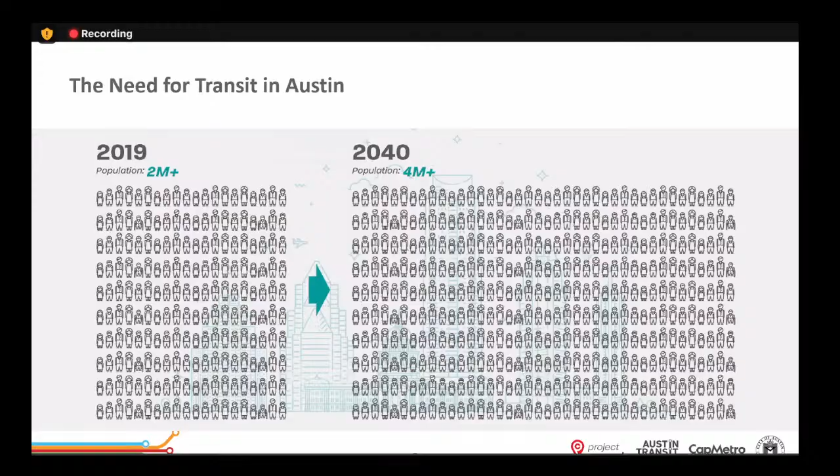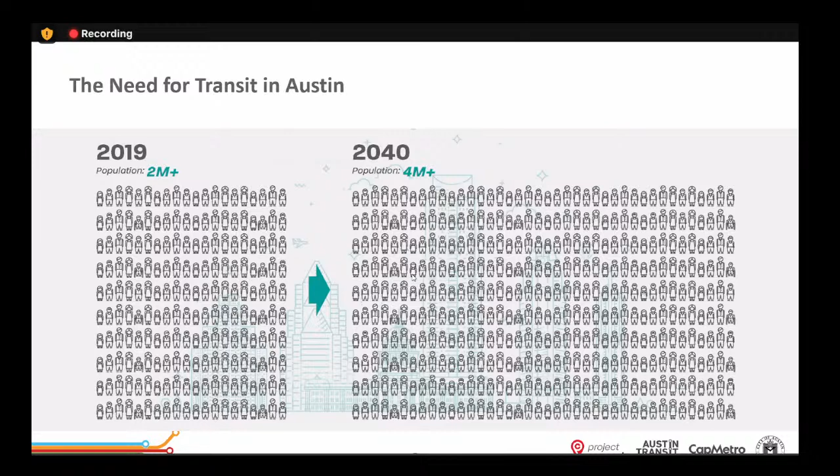So why are we here? What you see here is a projection of the growth in Austin's population. We're seeing a doubling of the population in Austin by 2040. So, where are these people going to travel? How are they going to get to work, to play? So Project Connect helps us to answer that growth in the population of Austin. Next slide, please. Thank you.

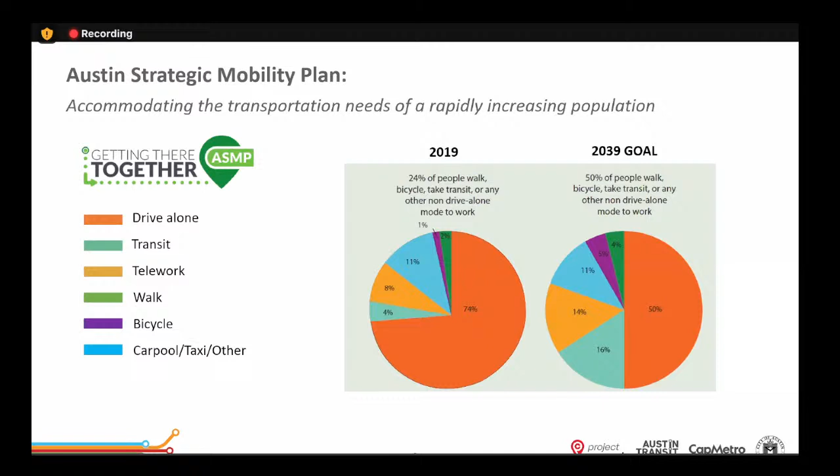So the Austin Strategic Mobility Plan, which was approved by the council in 2019, aims to keep the number of cars constant while growing our population by the additional 2 million people we just saw on the previous slide. You'll see that as we go through the design drawings, this is where policy rubber meets the road, and we are designing to a variety of modes.

Here you can see the Project Connect program components. We have a new light rail system, a transit tunnel under downtown, an expanded bus system with 4 new MetroRapid routes, as well as 9 new park and rides, and a transition to a zero emissions fleet. Next slide, please.

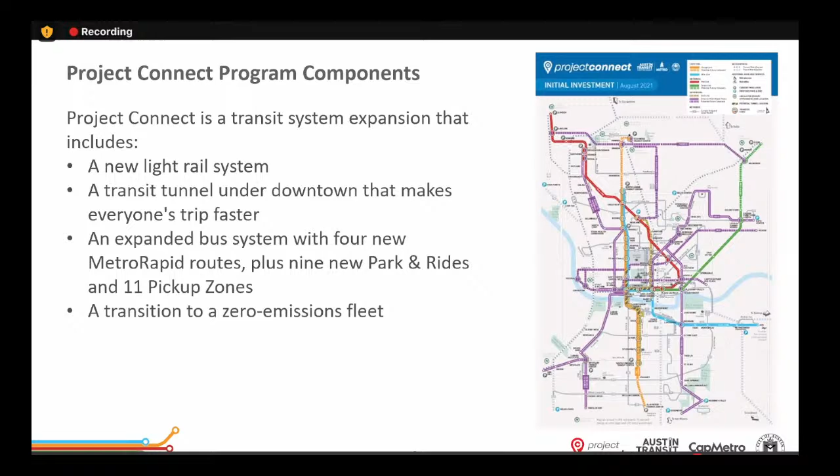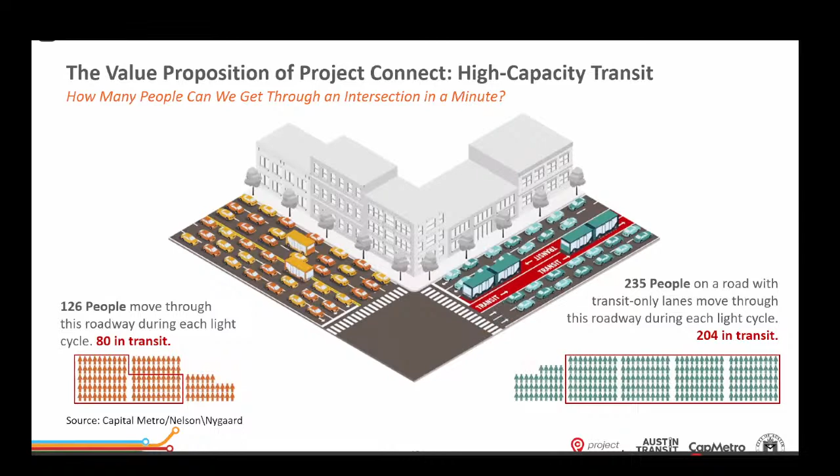The value proposition of Project Connect. So what we're really here to talk to you about and what we're looking to achieve is increasing the throughput of people on the street. You can see here in this illustration that the street on the left will move 126 people, with 80 of those folks in transit, whereas the street on the right will move 235 people, with 204 in transit.

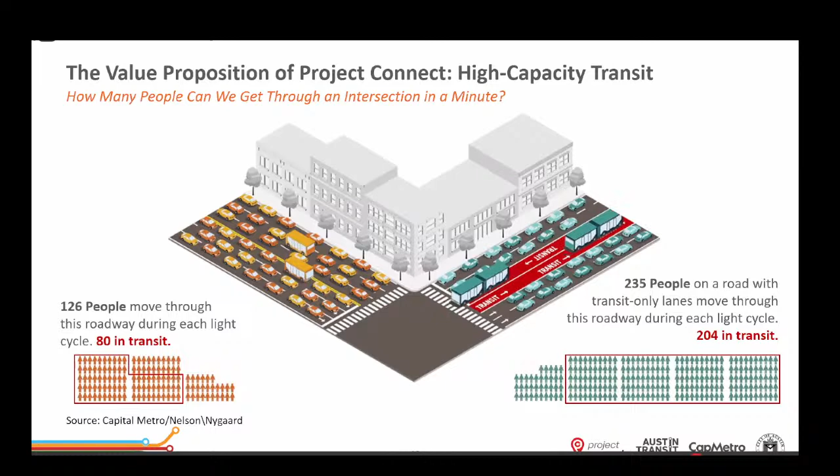Next slide, please. Thank you. So I really want to stress that Project Connect reflects the Austin community values. This project will help create thousands of good local jobs and provide more access to healthcare, education, employment, entertainment, and essential services. It will also create and maintain a more affordable place to live.

There is a shared passion in our community for the environment. That's why we are committed to sustainable practices. They are core to Project Connect, including a zero emissions fleet. And technology and innovation inspire much of who we are as a region. And so Project Connect is embracing that spirit, looking to make transportation smarter, more efficient, enjoyable, and easier to use.

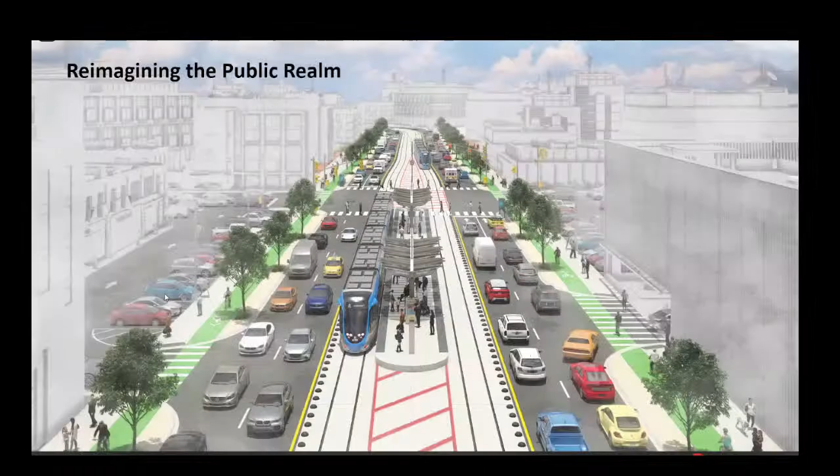Next slide, please. Thank you. So here you see an artist's rendering of what the street could look like. This isn't necessarily one particular area for either the orange or blue line, but it's representative of our program's goals. So just working our way left to right, new sidewalk, new bike lane, trees, roadway for vehicles, the light rail line in the center of the roadway with a station platform, and then a similar treatment in the other direction of new sidewalks, a bike lane, and trees.

So where are we right now in the process? We have completed our 15% design, and that was published in the summer of 2021. And we have entered into FTA, or Federal Transit Administration, project development. We are working on our 30% design, and we are looking to release that in the summer. And this all leads to, in the winter, a final EIS, or environmental impact statement, and an FTA record of decision, or ROD.

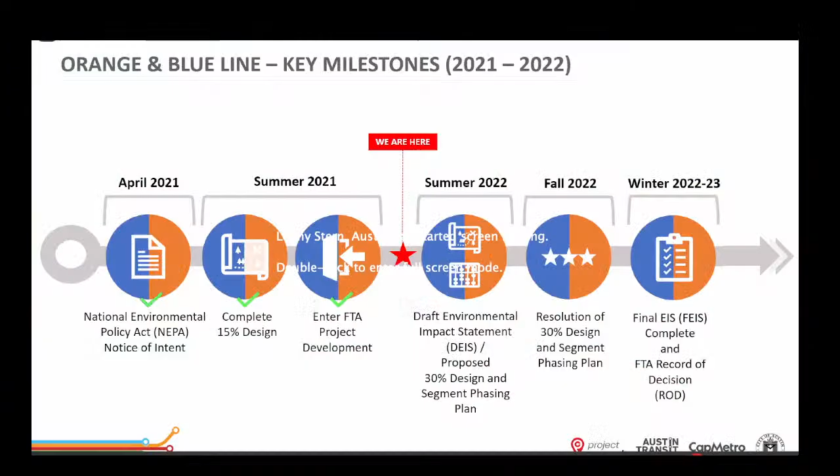So I wanted to remind everybody where we actually started. So back before the, oops, we lost our presentation here. Well, I'll start verbalizing until the picture comes back up. Back before the referendum, we went through a process called the alternatives analysis, which ultimately resulted in what we call a locally preferred alternative. And that's where we started at that time. This was pre 15% design. So we did not have that, right? But after the referendum, as we go through the process of beginning the preliminary engineering effort, you go through all types of discovery, and we lost it again. There we go. Thank you very much, everybody.

So one of the things that we discovered, we always knew that we needed to have a tunnel in the downtown area. That's because the block lengths are too short to be able to accommodate a full length of a train and a train's platform in that particular area, and we need to have at least 300 to 400 feet there for our full length trains. So we always knew that we were going to need to have a tunnel there.

And the intent at that time was, after Republic Square, that we would come up as quickly as we could and cross over Lady Bird Lake on a bridge. And that was, again, before the referendum. But as we went through the design process, we determined that because of that distance and the depth that we needed to be for the Republic Square station, getting back up to grade in such a short distance was going to be not very favorable. It could be done, but it was going to be very challenging for the vehicle to climb more than a 6% grade.

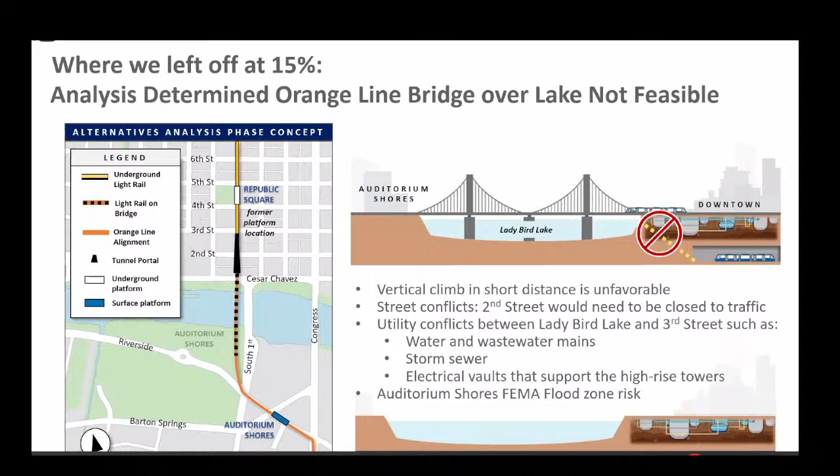So we determined that the best way to go would be to continue under the river. And if you can click there, we basically would stay underground. And you can see that in the illustration there below. So that was determined to be the best approach. And that's where we left off at 15% design. So let's click to the next slide.

So at that point in time, the question became, all right, how do we want to get back up from under the ground? We were looking at 2 options during our 15% design, what we called a short tunnel and a long tunnel. And you can see on the left hand, the short tunnel, that the portal, again, that's the transition point of where you come out from the ground, is around Nellie Academy area. And then the light rail would run at grade the rest of the way south

as it went through the SoCo business district. Now, in that scenario, our South Congress station would have to be fairly far south in that Leland Mary area, because it needs to really be on a flat spot. As we all are aware, the South Congress area, especially the South Congress business district, is quite a steep grade there. And it's just uncomfortable for passengers and trains and people with disabilities to have access to a platform that's on a slope. So we need to go to a flat spot. And that area between Leland and Mary, which is near the elementary school, was the best spot.

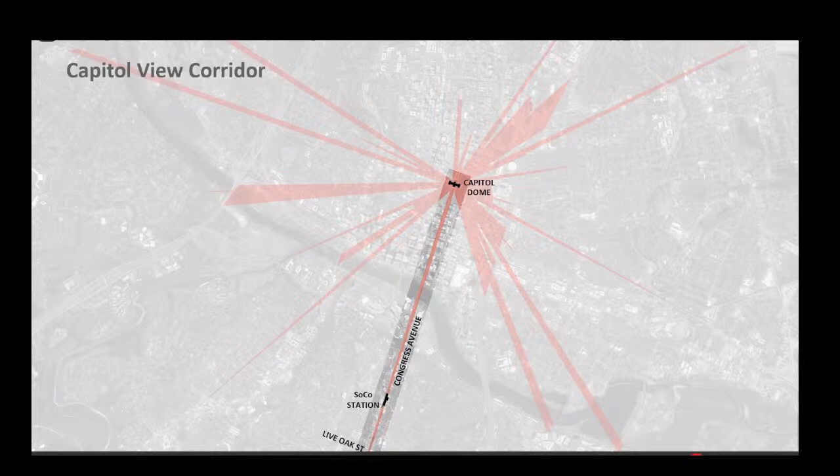The CVC was written to maintain the view of the Capitol Dome from key vantage points throughout the city. Here is a look at the CVC and the South Congress Corridor, where the CVC runs from the Capitol to Live Oak. Here, you can also see the proposed underground station and portal locations that we will talk through later in the presentation. Next slide.

This is how the CVC impacts the project. The two options we had at 15% are in the CVC. Our in-progress design reflects that we know the Capitol View Corridor extends to Live Oak. To comply with state law, the first location the train can surface is south of that viewpoint at Live Oak Street, and the tunnel is extended 900 feet further from the previous long tunnel option. The current extended tunnel option is the only option that is currently permissible given the requirements of the CVC.

Next slide. Here you see all four options we have explored. The first is the option that we showed you earlier that Jerry went through that we found does not work due to technical constraints. And a reminder of what we looked at: 15%, the short tunnel and the long tunnel options. And lastly, the extended tunnel resulting from adapting to the underground components of the CVC.

There are additional costs, which we will discuss on the next slide, but there are also additional benefits, such as it provides increased transit efficiency, has few neighborhood impacts, and provides for a more centralized SoCo station location. Next slide.

Here we see the rough order range of costs. To set the stage for this slide and to put these costs in context, when we look at the pre-15% design, it's from 3rd Street to Live Oak, which is a little further south than what the graphic shows here. That cost was estimated in the range of $300 million to $350 million. And as previously discussed, that option proved infeasible.

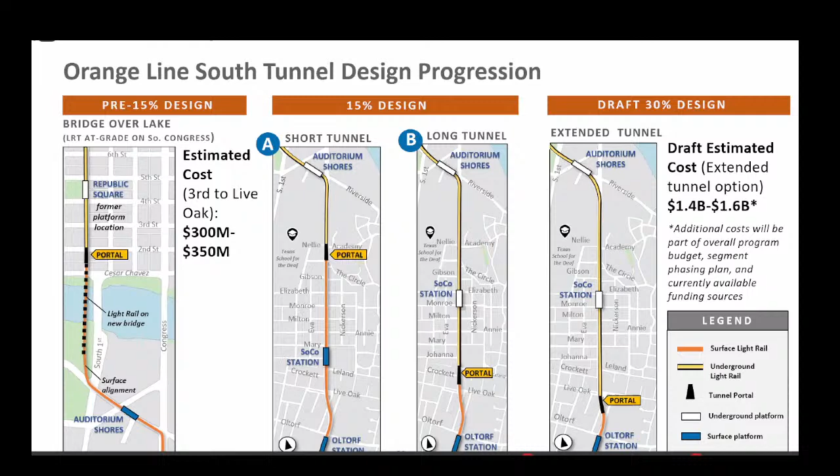Okay, we are now going to transition to walk through a segment between roughly St. Ed's near Havana and go north towards Nellie Academy. We'll cover the segment north of Nellie Academy in another working group meeting planned for June. But before we dive into the design, we want to orient you to what you're about to see in the engineering drawings. Next slide.

North is to the right, south is to the left. The northbound tracks are red, the southbound tracks are blue. The sidewalks are outlined in orange, the bike lanes in purple. Traffic lanes are shown in a light blue teal color. The right-of-way line is shown as a white dash line, and the curb line is a green dash line.

Now, as we go through this, you may note there are property impacts in this segment. At this point, we have notified property owners, but if you are a business owner or know of one who has not had the opportunity to meet with us, we are using this as another touch point to be open and transparent. So please use this as an opportunity to get in touch with us. Andrew and Lonnie will now walk us through the proposed design update, starting with the area just north of St. Ed's.

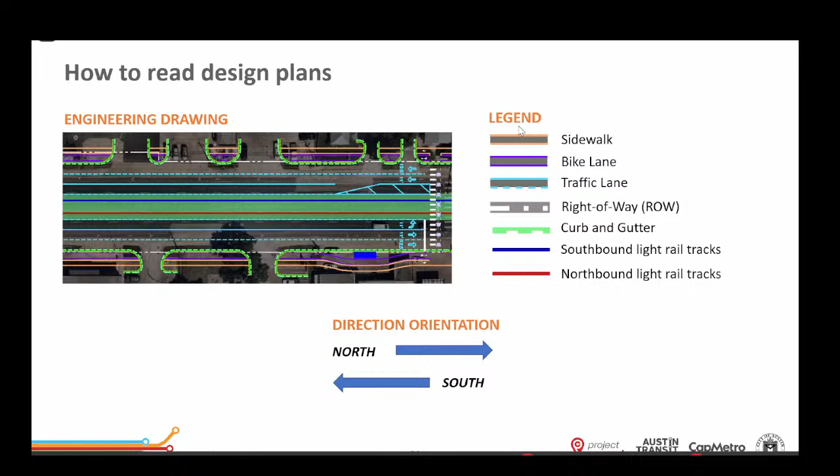But Andrew, it looks like you're on screen now, and this is not what people want to see. They want to see the specific engineering drawings, and I think you're sitting on that. Are you able to share your screen? Yeah, I'm trying to jump in right now. Let me know when you can see it. Okay. All right, very good. So this has been mentioned. I still cannot see it. I see a black screen. There we go. There we go.

All right, so lots of colors, and I have color blindness. So can you orient me a little bit better here? Yeah, so just to reiterate what Sophia was going through, imagine yourself as a bird in the air looking down on the transit system. Right in the middle of the roadway there, in that green highlight, is where the light rail system will go. We're looking at a station platform at St. Ed's, which is represented by that hatch there in the middle.

And then outside of that, in that light blue color, is where the roadway striping would be. So that's where the vehicles will be able to travel outside of the transit system in the middle of the road. And then outside of that, we have that green line. That's where the curb lines would be on the outside of the roadway system, with sidewalks and bicycle facilities outside of that.

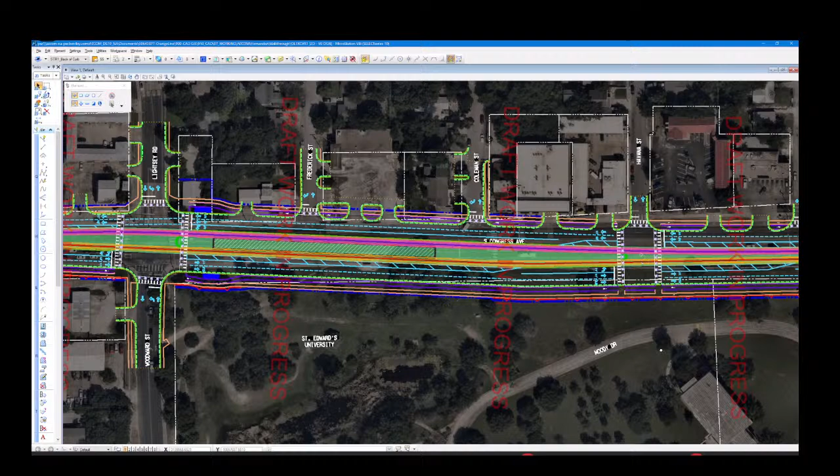Just want to zoom in just a little bit more. Absolutely. How's that? Maybe one more. There you go. There you go. Now I can see.

Great. Okay, very good. So I'll pick it up here at Havana Street, just north of that station platform. I do want to make a general point that, existing case today, cars are able to freely move around these roadways. To put the transit system in place, we really have to control those turning movements and control where people can cross the transit way, for safety and operations reasons.

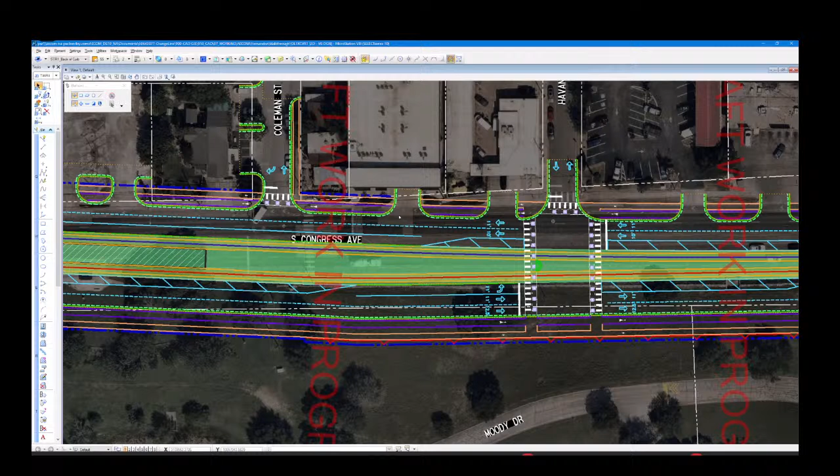So because of that, we will have signalized intersections at key locations, Havana being one of those locations where vehicles are able to make those turning movements and access the existing businesses on either side of the corridor. So Havana is a good example of where one of those signalized intersections would go. I'll keep moving north a little bit here, and bear with me on my bandwidth. I hope it's not too choppy for y'all.

I'm glad you brought up Havana, because I know that the Metro Rapid station isn't really centered around Havana, and neither is the hybrid beacon, but Havana is a central street for that neighborhood over there. So new access for that part of town. All right, so we're heading north, it looks like. Yeah, that heading there's north. 2 lanes heading north and a left-hand turn lane there by University.

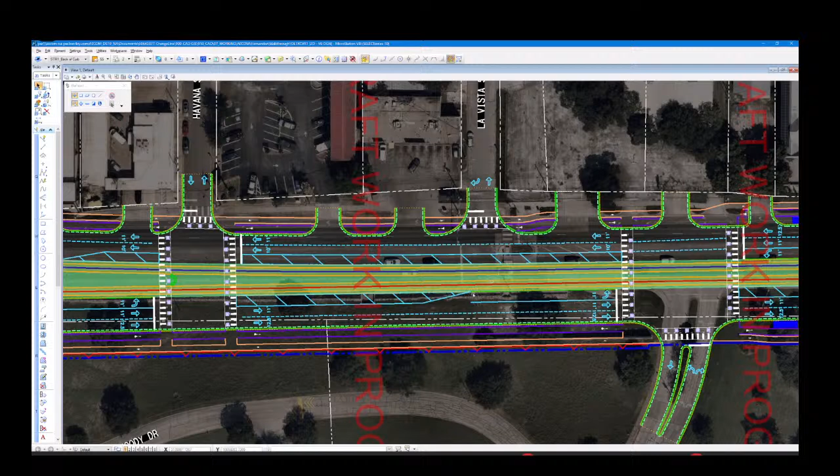Yep. So we get to La Vista and there's no longer the ability to cross the guideway or cross the street here. So vehicles would have to go to either University Circle here or Havana to make a U-turn and access either side of the street. So just wanted to point that out as an example for what the new access plan would be with the light rail in the middle of the street.

You'll notice these driveway tie-ins. This green shape is where we tie back into the existing pavement. We are going to maintain all driveway access along the corridor. So you'll notice these areas that cut into the sidewalk and bike ped. Those are where those driveways would go to the existing businesses along the corridor.

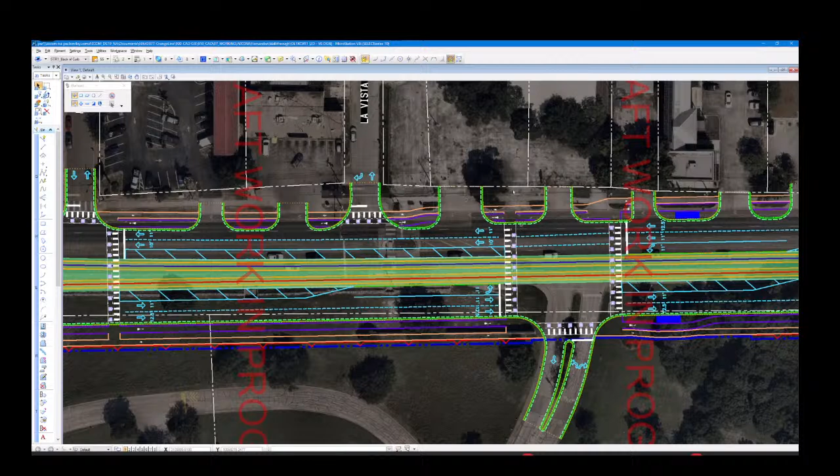I'll keep moving north. You'll notice these blue boxes. These will be local bus stops in the final configuration. So, key connection points with the light rail system. We're going to have to connect with the local transit systems as well, make those key connection points along the way. So our design definitely includes bus stops along the way, as well as our new light rail platforms in the middle of the road.

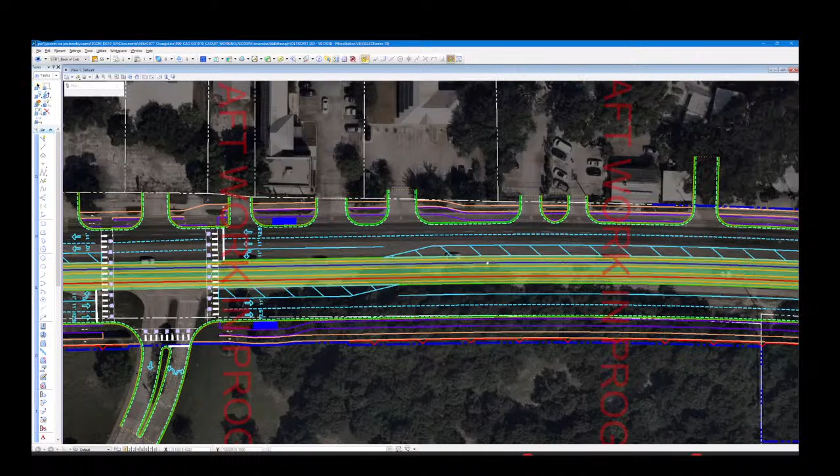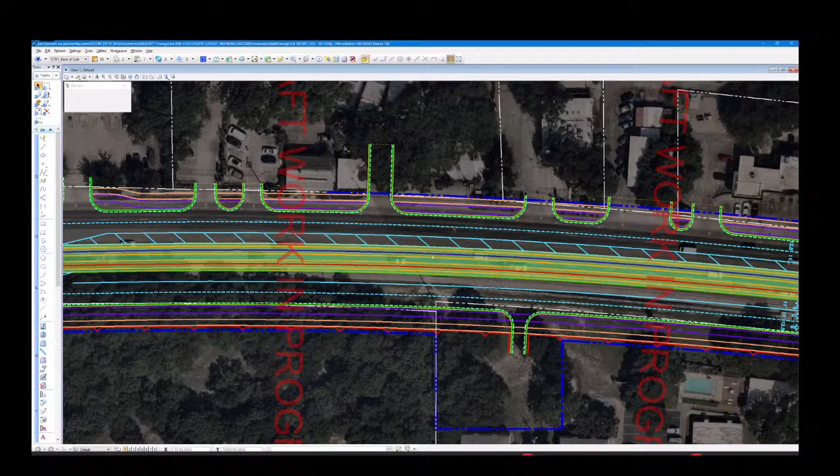I'll keep moving north here. Generally through this area, we are at the surface level with the light rail traveling in the middle. We do have generally 2 roadway lanes going each direction with those turn lanes at those signalized intersections. So the next major one here is going to be Oltorf. We have Cumberland as well. So more of the same here, another signalized intersection, providing that access, the ability to do the U-turns as well. And we do have 2 more bus stops here as well.

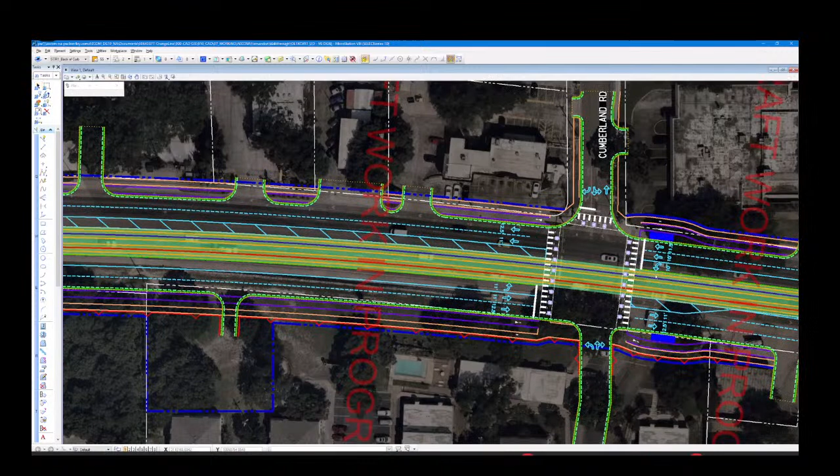Do you want to keep moving to get to Oltorf? I think that's a little bit more of a nuanced location. I might zoom out a little bit. No, I think it's going to be helpful for this audience here. Can you show, right here in Cumberland, where the current right-of-way line is, and then the future proposed right-of-way line? Yeah, absolutely. Let me zoom back in a little bit.

Thanks. So the existing right-of-way line is represented by this white dashed line. It's a little bit faint, but I hope y'all can see that. And then this darker blue line on the outside is where the new right-of-way line would be. So especially in areas of our station platforms, certainly in areas where we're trying to accommodate local bus stops, we do have to push out the footprint of the overall transit, roadway, bike ped, all that stuff together.

And in certain cases, it does get pushed out beyond the existing right-of-way line. So here's an example of where the sidewalk would go around the proposed bus stop, and we do have proposed right-of-way along this area. And I think this is a good time to just point out that there is a team working on right-of-way acquisition, and they have pretty much sent out mailers and tried to meet with people for whom there could be a right-of-way impact.

And so if you're seeing this tonight and you're saying, oh, that's my property, I haven't spoken to you yet, please let us know in the Q&A. We absolutely do want to be in touch with you, and we have sent letters, but just sending letters doesn't mean the same thing as it's time to meet with you. So again, please take a look at that, keep an eye on those lines, and we'll keep an eye on that throughout the whole corridor tonight.

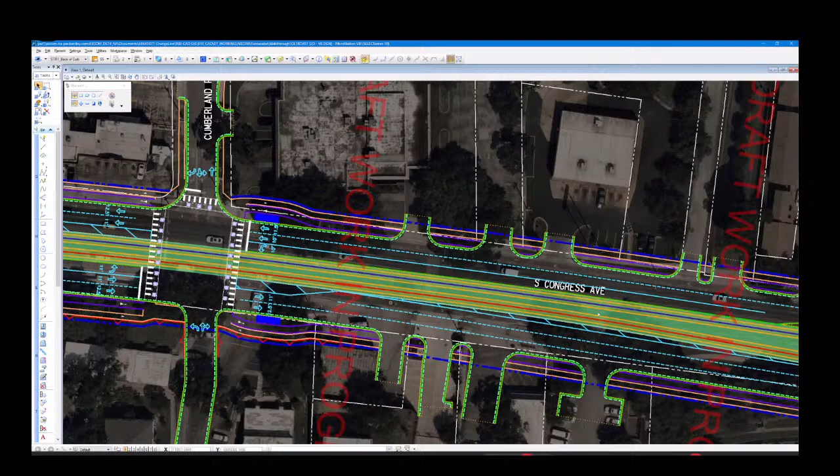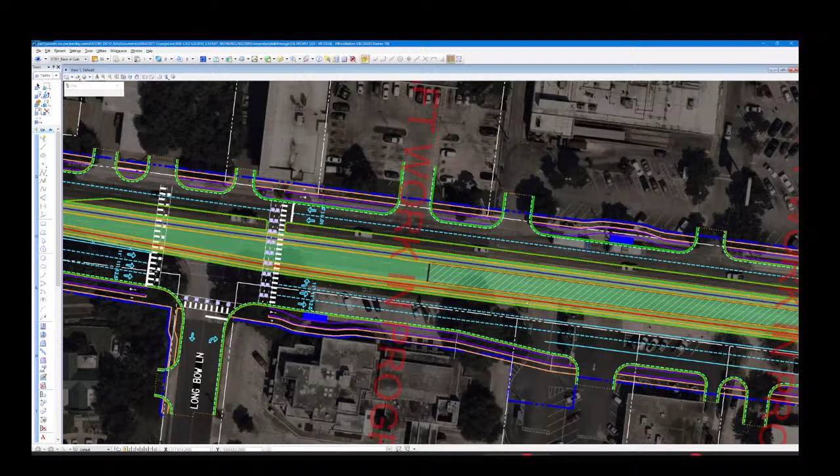Just zoom out a little bit. So you're seeing a lot of those driveway access points, more of the light rail in the middle of the street. And you do start to see the light rail tracks get a little bit wider through here. And that is because we're getting to our Oltorf station. So what you see here in the middle is a center platform which will serve both the northbound tracks and the southbound tracks. And because of that, we have to push those tracks out to accommodate the station platform in the middle. And we do have some right-of-way impacts as a result of that to accommodate that full footprint of the station platform, the tracks, as well as the turn lanes at Oltorf.

This is a very busy area. It looks like you're right by the HEB, and with that center platform, it looks like when you arrive and when you leave the HEB, you're on the same side of the street. You don't have to cross Oltorf anymore carrying your groceries. So that's exciting. But I do see that the right-of-way line looks like it's pushing over into the east side. Are you running into buildings there, or what are those impacts looking like?

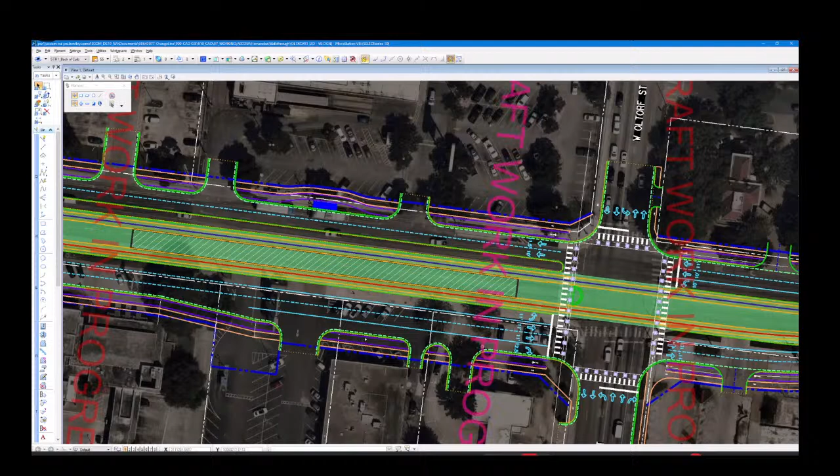Yeah, thanks for pointing that out, Lonnie. We do have a little bit more right-of-way impact on the east side, and the reason for that is there's some major utilities on the HEB site that we're needing to avoid. So we are pushing out to the east, but I'm glad you pointed out that we are not hitting any buildings in this location. So we do have some additional right-of-way takes on this side of the roadway, but no building impacts associated with those.

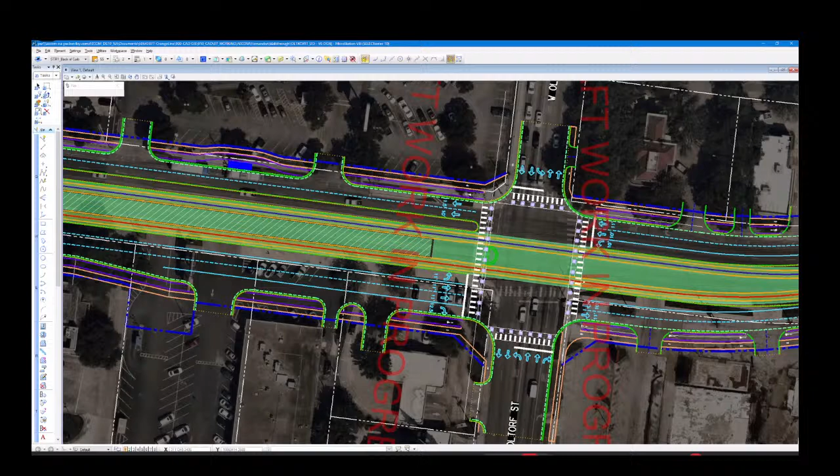Okay, so now we're getting to Oltorf, which means we're almost out the portal. I'm excited. I'm sure a lot of people here today want to see what's going on South Congress, so we're about to get there. Yep, and I just want to make one more point about Oltorf before we move on. As you see on the north side of the intersection here, the roadway starts to curve around, and because of that, we have located the station platform on the south side. So sometimes we look at having side platforms on either side of the roadway, but in this particular case, because of the roadway curvature, we are putting the platform just on the south side here.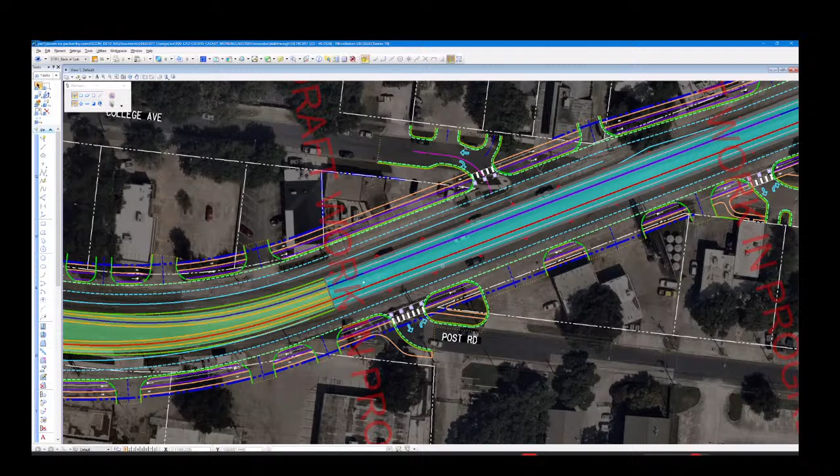And it looks like there's some impacts there. That looks like the Teal House. That looks like Southside Flying Pizza having some. Correct. So if you're in the audience tonight and you haven't spoken with anyone from our right-of-way acquisition team, this would be a good time to reach out and let us know.

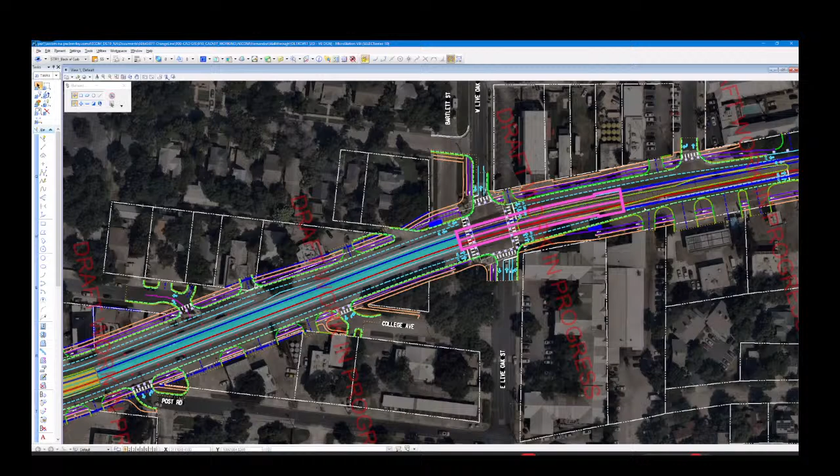But once we go further north from the pink box, we're in what's called a bored tunnel configuration, meaning we don't have to dig down from the surface. So the impact to the surface during construction is not going to correspond with the tunnel boring machine. It'll only correspond with these areas where we have to dig down from the top. So there is a short... Yeah, sorry, go ahead, Lonnie.

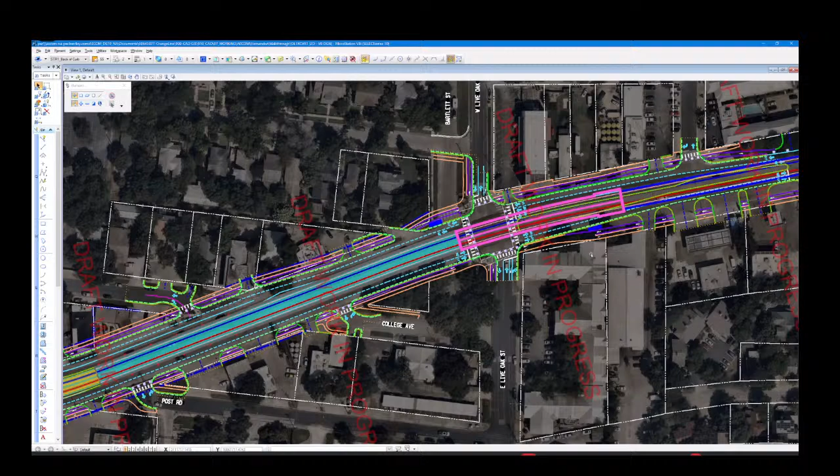Oh, Andrew, I was just going to say, I think we made a promise to people that we would stop before we got too far down into the tunnel to see if there are any questions leading up to the tunnel section. So I kind of want to wrap up right here, and then we'll open to Q&A. And again, this is that version of the portal. So this is literally where we stopped, where the train was about to go in the tunnel.

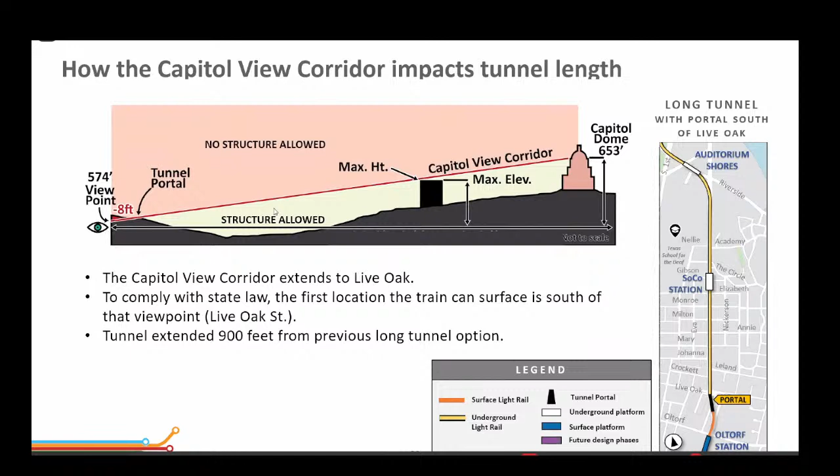The viewpoint for South Congress happens to be at Live Oak, but the designated viewpoint is actually 8 feet under the ground. But regardless, that plane, that red line, cannot be broken. So for the short tunnel, as an example, the station that would be located near Lively Middle School, that structure of the canopies and the overhead catenary system, which powers the train, would break that plane. Additionally, if it's the long tunnel, on the previous 15% design, we were showing that the long tunnel would emerge just north of Live Oak Street.

And that portal is not just a hole in the ground. The portal has side structures, things that support, so vehicles, for example, don't accidentally drive into the portal. It's kind of like a Jersey barrier on a highway, for example. It's usually about that size, and they can be taller. They can have landscaping associated with them. There's a lot of different things you can do with these portals. Regardless, that portal is still going to break that plane of the view corridor, and you still have the catenary system, the poles that hold up the wires. Sophia, anything to add to that?

I was just going to emphasize, I think the unique characteristic that we found out with the Capitol View Corridor is that it actually goes underground, like 8 feet underground. That was not something we expected when we were researching this and looking at state law and things like that. So that's kind of what caused us to also take another look at that design for the portal, the stations, and ultimately ended up with the extended tunnel.

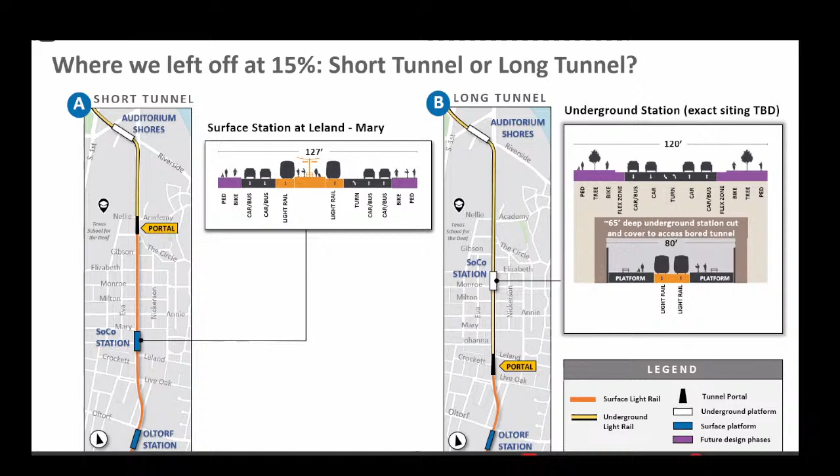I see several other questions, and I know people are working on the Q&A in the background to post. I see a question here about the interaction with traffic. So one person asked, is the train going to blow its horn? Another person was asking, are we stopping traffic, or is traffic going to stop the train? Could anybody talk a little bit more about that?

I'll start with the train noise. A couple of things: we're still trying to figure out what the train is going to look like, how it's going to interact, and what our operations will look like. While we don't expect that we would have to blow the whistle or blow the horn as we're coming out of the portal, it's something that we have yet to fully determine.

In traditional operations, a bell is usually rung as you're leaving and entering the station, and the horn itself, which is the really loud horn, is usually used in an emergency. If there's a car that's stuck, a person that's laying across the tracks, it's usually just a really loud horn, and those are used for emergencies. Pass it to Anna for the traffic signaling question.

Thanks, Sophia. Anna Martin with the City of Austin Transportation Department, and we're the entity that operates and maintains all the traffic signals in Austin. We've been working really closely with the ATP and design teams on what this will look like in the future. And we've made the commitment and goal that the LRT will receive priority. And that means that the goal is to progress trains from station to station without delay.

So unless something major is going on, the train should not typically be stopping at red lights. And so the travel time should be very, very reliable. We do have lots of other modes and needs to balance, so we have a lot of work to do to get there, but that is our commitment to this project.

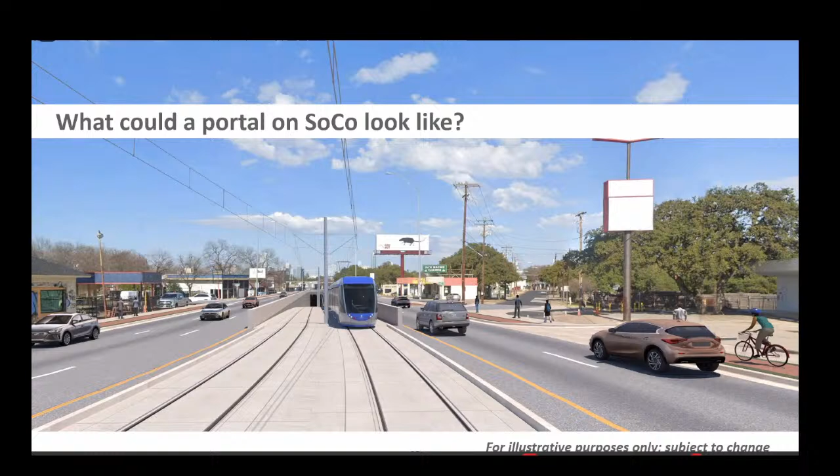Okay. But we are looking at all the different technologies. We are looking at cutting edge technology on the vehicle, on how that can be powered. We're looking at on wire, which is what you see here. We're looking at off wire, which is a battery operated train or vehicle as well. So more to come on that. That is pretty exciting. We're talking to a lot of vehicle manufacturers and trying to see what's out in the industry, not only for today, but what could exist in the future that we could take advantage of. Well, thanks for that context, Sophia.

And now I think we're gonna move through the walkthrough from Live Oak to Academy, also known as Nellie for some of those out in the audience, and take a closer look at what's gonna be happening on SoCo itself. So let's take it away, Andrew. All right. Let me know when you can see my screen. I know there was a little bit of a delay last time. I gotcha. All right, fantastic.

So I think we're picking it up really just where that rendering was showing that transition point. So as Sophia mentioned, the blue is that open cut where we're transitioning down underground. The pink would be an area of cut and cover, meaning we are digging down from the surface to the underground. And then you can kind of see, this is a really good transition point to point out.

I'm going to pan over to the right a little bit, but you can see where that pink shape just gets a little bit wider, and that represents the location where that boring machine will be extracted from the ground. So we need a little bit of a wider footprint to take the machine out of the ground at this location. But as a benefit for using the boring machine, really everything from the north from this location is going to be

Recording stopped. I think the recording stopped. Not sure why.

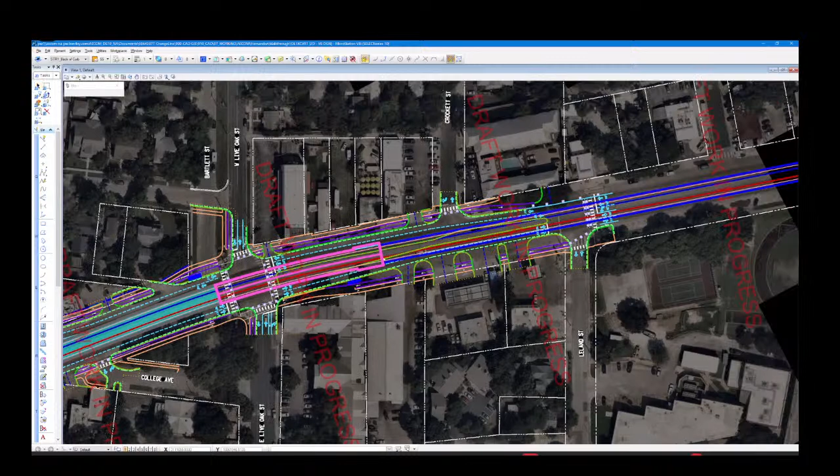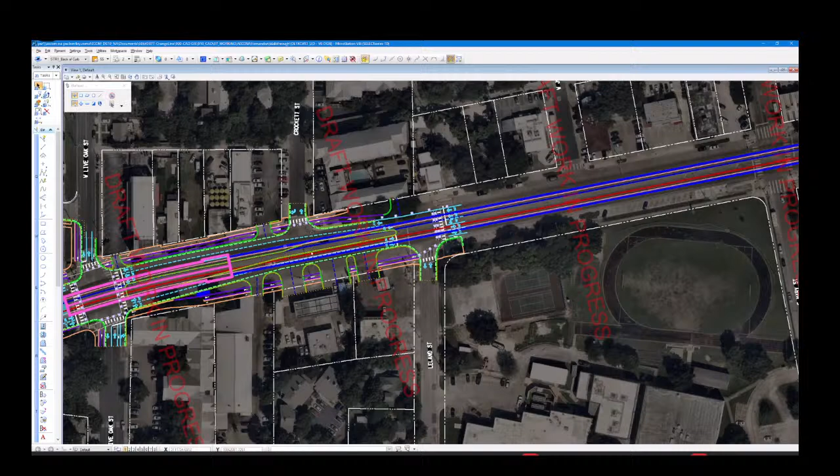We are in a bored tunnel configuration from here heading north. You'll notice that our roadway improvements generally follow to the next major intersection. So that's why you see those roadway improvements continuing and not just dropping off with our cut and cover. So we are taking those roadway improvements all the way to Leland Street.

I can tell you that the City of Austin is looking at parallel projects to this one that will essentially fill in the gaps where we don't have those surface impacts and aren't doing associated roadway bike ped improvements. So ideally that will be a kind of a concurrent process along with the Orange Line construction.

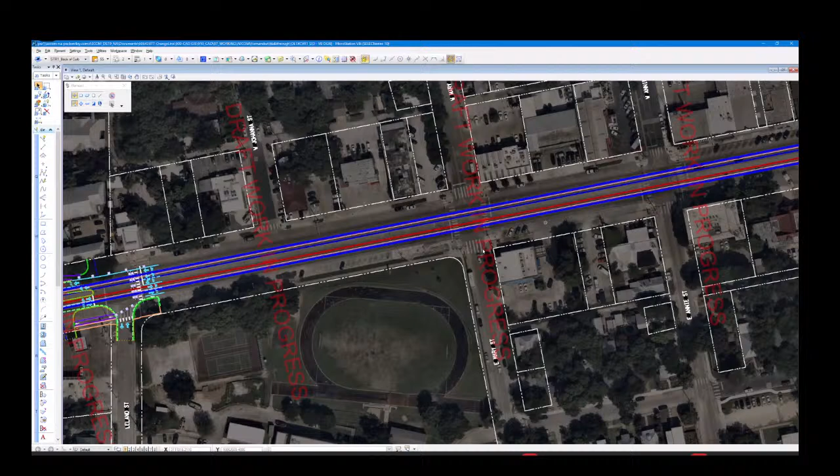So I'll keep moving north here. We are in the fully bored tunnel configuration, so you'll just notice that's all we're showing here. There's no surface impacts through this area. Passing by Lively Middle School, through Mary, through Annie, and once we get to Milton Street, that's where you'll start to see those roadway improvements pick back up.

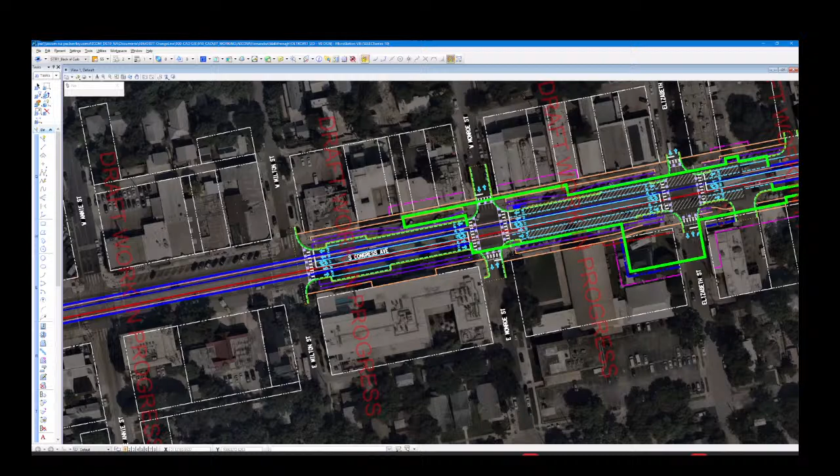And then you'll also notice a thicker light green line here, and that represents our station box. So really that thicker light green line here is going to be the major area of impact in this location, where we will have to dig down from the surface to dig out our station box to accommodate the station platforms in the middle, as well as 3 entrance locations for this station at SoCo.

So Andrew, what you're saying is over here, we'll stop doing a tunnel boring and we'll have to do pretty much a hole in the ground to build out the station. Is that correct? Yeah, that's exactly right, Vikram. So really outside of the thicker green line, we'll be in that tunnel boring machine configuration. And then everything within that thicker green line, the station box, will be constructed with a cut and cover method.

And so what are roughly the limits of that cut and cover method? It looks like it's a couple of blocks there. Could you tell us the street names? Yeah, so we have a few entrances, one just south of Monroe. So you see a tiny little sliver there to accommodate that station entrance. Then from Monroe, generally past Elizabeth, through the middle of the street is where the core of our station box is. Then we have 2 other entrance locations here on the corner at Elizabeth and South Congress.

We have our primary station entrance, and this is the largest footprint and kind of the identifier for the public, really, that a nice transit station is down below them. This is kind of called that primary prominent station entrance, whereas these are a little bit smaller footprint. They need to be in line with the sidewalk and the bicycle facilities, so they can't be quite as wide. But we do have one there at Monroe, as well as just north of Elizabeth near the Home Slice is where that other secondary station entrance would be.

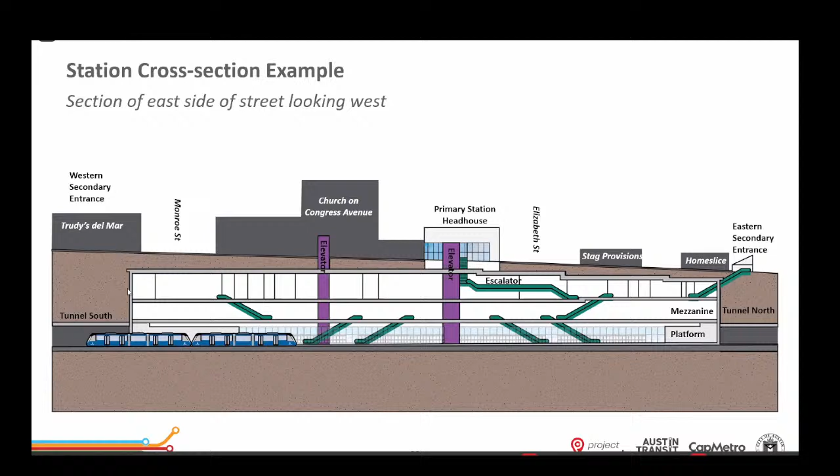And then the very top level is what we call kind of the back of house. And that's where some of the ancillary facilities will go to serve the station, but those won't be available to the public. Those are just to serve the station, to maintain it and to operate it.

Oh, great. And now here we see the layout of the station. So Andrew, just working our way south to north, it looks like we have a secondary access proposed in front of kind of a Noah Marion and the Hummingbird development, it says on there. Right. And so would that be stairs and an escalator, or just stairs? And where's the elevator going to be here? Yeah, that's exactly right. That's stairs and an escalator in this particular location. We do have an elevator as you go a little bit further north, just in front of the Allen's Boots, a little bit past it.

Likewise, in the eastern secondary access location, we do have another stair escalator combo. So that smaller footprint can accommodate the bicycle and pedestrian facilities kind of around it or behind it. And then we do have in the middle that primary entrance, which will have both elevators as well as some of our vent facilities that need to serve the station.

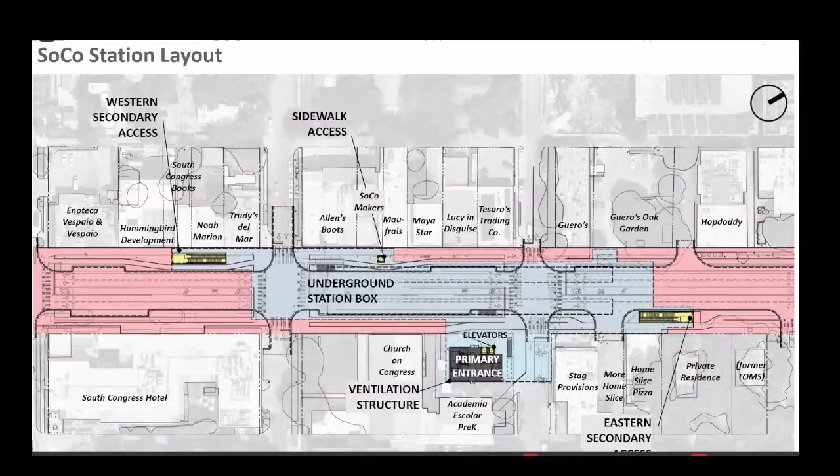So that's kind of a dual purpose location where we have to have some of the air push and pull from that corner there near the church. But that is also going to be our primary entrance. That should be the most prominent location that kind of marks the station for the community here. Yeah, that's that corner. Like a new configuration now that the station is in that primary heart of the district.

I see some chatter in the Q&A, kind of giving you a thumbs up for that. It looks like this area right here is a proposed primary station entrance. For some of us, we might think of this as being where Hey Cupcake was back in the day. This space is one of the few places where there's room for this grand entrance without sacrificing a physical building in this area. And so I think we've got some slides here, kind of like our sort of a Pinterest reel, some inspiration of what we're thinking about in this area.

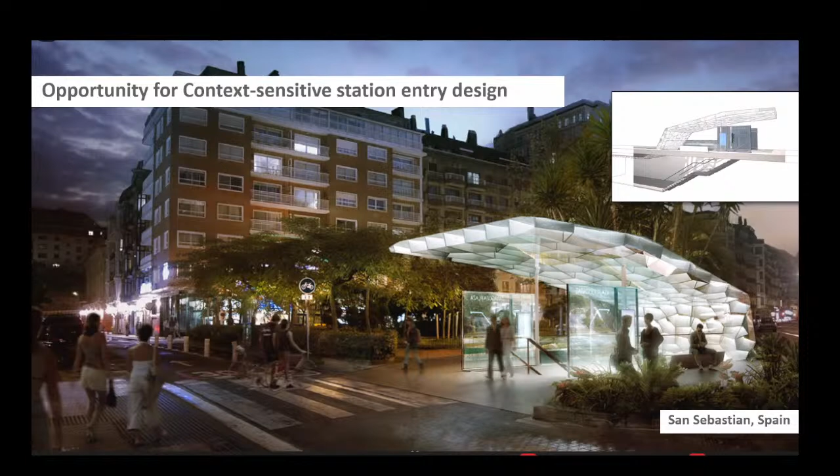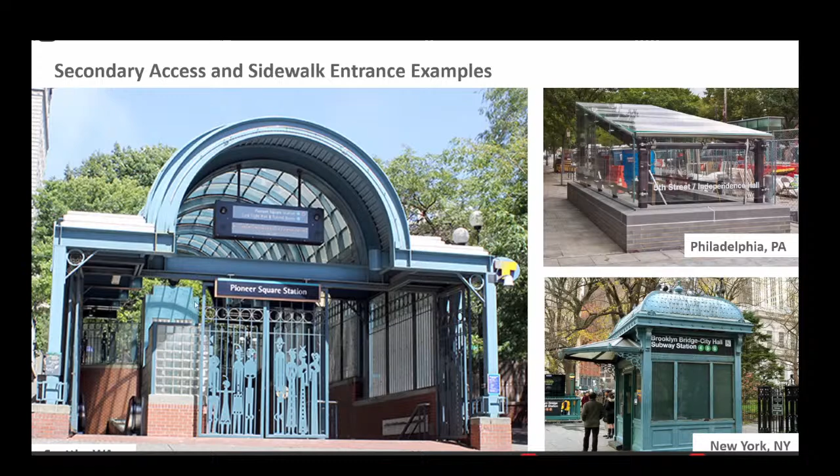Let's keep going. Some other smaller head houses for the secondary access panels. So again, this could look like what the staircase and escalator or what the elevator entrances could look like. Now, we're not going to copy the design from Seattle or New York or Philadelphia. These are just examples of other cities and how they've done it. We in the city of Austin are going to do it our own special way. Let's see, have you got any more images?

Yeah, actually, you know, some of you may be familiar with Cap Metro in its current location at the SoCo station. And you'll notice those electrical boxes there were an art project that went with the Metro Rapid. So we have a long history of kind of bringing the look and feel of SoCo in this area, and we're eager to engage with the arts community to bring that there.

As a side note, I know we were talking to some folks from the PID and the Merchants Association, and they said they're going to be expanding this art box project in the corridor. And I'm excited to hear that. It means that we've got that right look and feel, and that you're hoping to expand it in the area. So hopefully you'll feel that way about the new head house and station as well.

Thanks, Meg. So this is a slightly cleaner version. This is what happens afterwards. This is a cross-section of the future design, but it's also flexible based on the feedback that we get from this meeting and future meetings. And remember, we're on the 30% design round, 60% is ahead, and we'll be talking about look and feel. But what you're seeing here is that those station entrances are in areas that do not block the sidewalk.

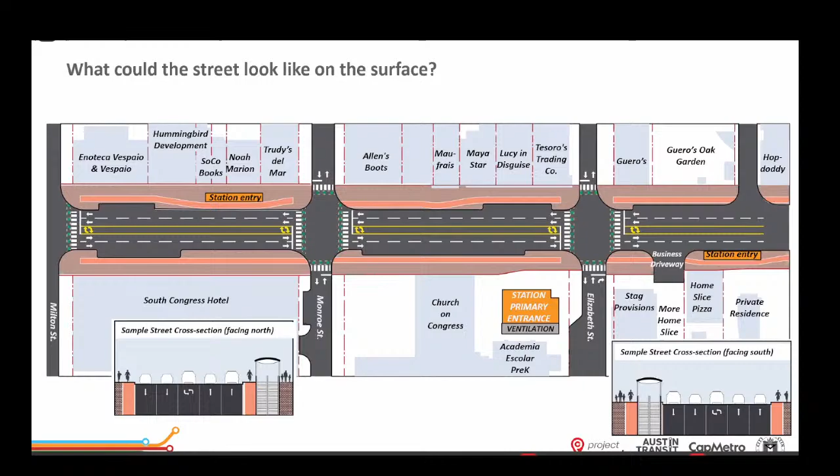All right, with this, I think we're gonna turn it over to Joseph. Thank you, Joseph, for being here, just to talk a little bit about a parallel project going on in this area. Thank you, Lonnie. Everybody, my name is Joseph Alhadri, and I am with the Austin Transportation Department.

And yeah, parking is a big deal, and we understand that the South Congress area has dealt with parking and mobility challenges over time. It's very well documented, and we know there's a bunch of questions about how construction and even after how this is going to affect mobility and parking in the SoCo district. So while Project Connect and the train will provide long-term sustainable solutions, like they said, it's years away from completion. So we need to start planning now.

So in the interim, we will be meeting with the community here shortly to talk about how we start that process now and what that looks like. Back in 2019, prior to the pandemic starting, we did a parking study. And in that parking study, in the South Congress area, it showed that there was need for mitigation, and it provided a number of strategies for us to start looking at that.

The first strategy it suggested was a parking and transportation management district, or you'll hear some people say PTMD for short. What that is, it's really a partnership with the city of Austin to really provide parking and mobility mitigation and solutions for this area with the community.

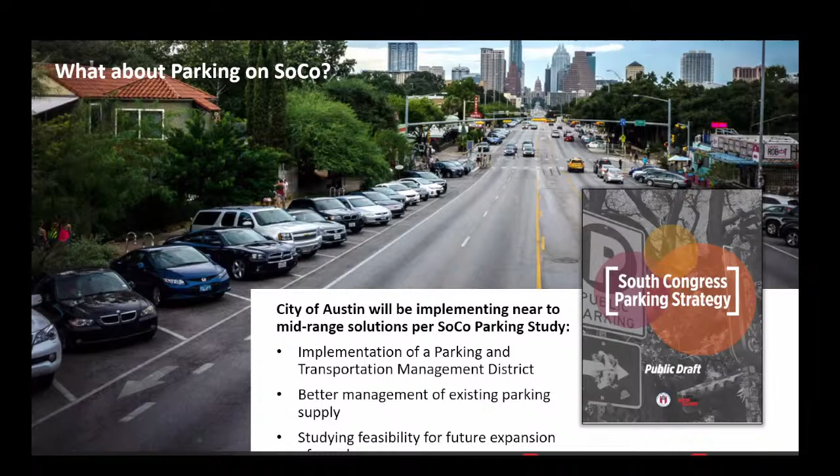I want to talk a little bit about what that process looks like. So we want to create and formalize a local advisory committee, and that's where we are right now. We are reaching out, talking to the individuals to start looking at meeting and starting the process of really looking at what these PTMD boundaries are.

Boundaries are important as we start looking at how funds can be used in the district and how mitigation works. We will want to have the boundaries set so that we can really focus on the projects within that area, as well as mitigation and other solutions. After that, we'll be submitting a formal application that puts out a different number of parking solutions, different ways for us to connect and understand how we mitigate some of the construction impacts during the construction phase of the train.

And then once we have all of those put together and understand the financial impacts, we'll go to the respective communities and really look at how we can work together to bring this to council and get approved for this policy. What this policy does is allows us to start working on those mitigation solutions now, prior to the impacts through construction and through the finishing, understanding that we already have some challenges now. So it's great to get ahead of that.

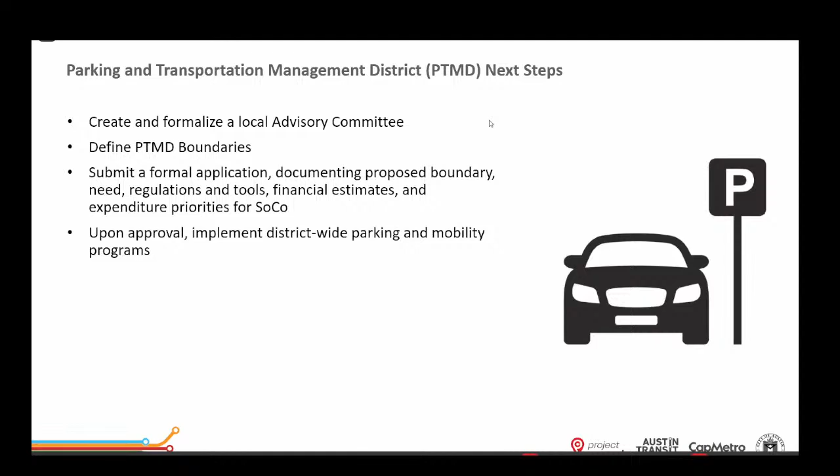So once it's approved, we are looking at starting those discussions about what tools we're going to put into place and trying to implement them prior to getting to those construction issues that potentially could cause delays in the area. Yeah, sure. And I can answer any questions if y'all have, or when we expand on it a little bit more.

Well, let's see, Andrew. I think you were going to continue a little bit with the engineering drawing, or are we ready for Q&A in this section? Yeah, let's keep going all the way to Academy, so then we can have a robust discussion for everyone. Right. Great. Thanks. We're almost done with the walkthrough. There's just a bit more to cover. So I'll share my screen again.

It's funny, if you're watching from home, believe it or not, we're ahead of schedule. We're doing great on time.

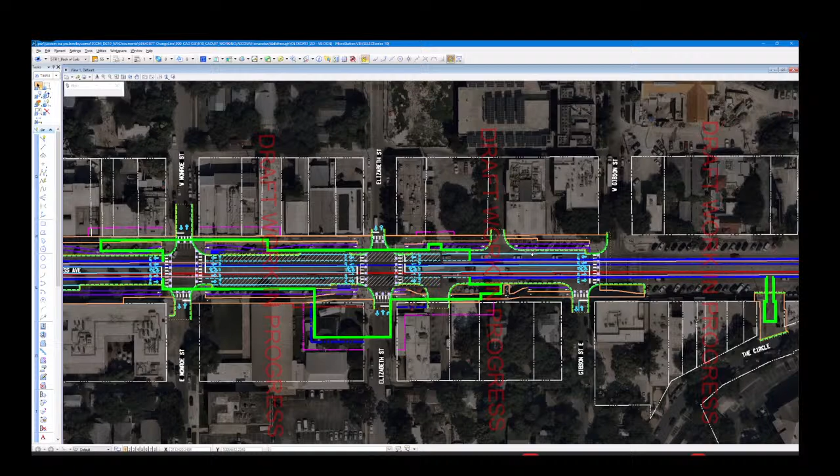All right, so there will be a chance to ask more questions about the station. I do want to keep this moving so we can get to that Q&A and start answering some of y'all's questions. We have a lot of time for that at the end. So I'll just continue from the north side of that station box, which, to remind you, is that thicker green line.

We are carrying the roadway improvements to the next intersection there at Gibson. And then we're back in that bored tunnel configuration that we were mentioning earlier. So everything's underground now. Everything's back underground, no impact to the surface. But I do want to point out one kind of weird looking shape here near the Circle Drive.

And that's an emergency egress location, which essentially, because of the fire code for building an underground tunnel, the distance between this station and our next station up north at Auditorium Shores is just too long to safely, in the event of an emergency, say there was a fire in the tunnel or there was smoke and we needed to get people out of that tunnel. There's a certain distance that people have to be able to travel per the fire code. So because of that fire code, we do need an emergency egress point within a certain distance. So that's what you'll notice there at that location near the circle.

I'm glad you brought that up, Andrew, because we've been having some discussions about wanting to get in touch with the folks at the Continental Club, just because we know that there's a lot of loading and unloading that happens there for live music. And we can work with you to make sure that that loading and unloading can still happen there. It just may be a slightly shifted location from where it currently is happening. Yeah, thanks for pointing that out, Lonnie.

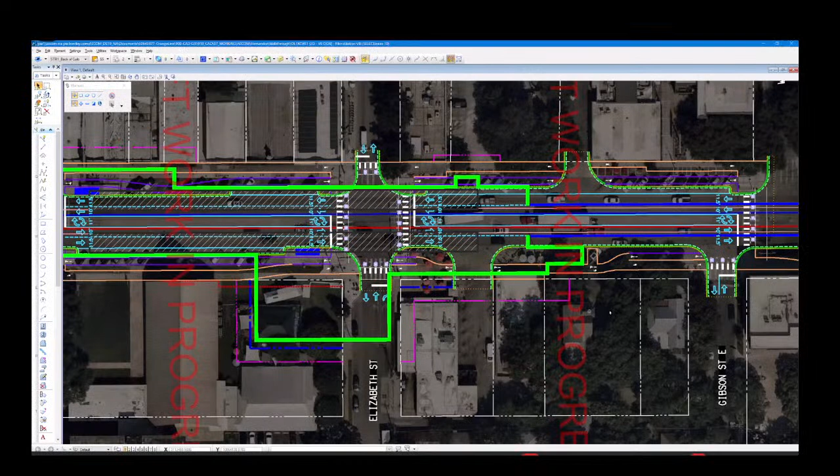And I'm going to add on to that after you answer this question, Andrew. We can just travel a little farther north. We have a request to look at the Academy section just after you address this one. All right, so we're back to this. Sorry, I was on mute. Yep. Can you handle it, Andrew?

Sure, yeah. I mean, I can just talk about why this location was chosen. It's somewhat of a redundant access point to the same street here, the circle. So we're trying not to impact buildings with this location first and foremost. So any unbuilt area of the right of way we can look at, that's priority number one. So the little throughput area was considered somewhat redundant as far as vehicular access.

Now the big thing, as we talked through earlier, is business access for loading and unloading first and foremost. So we really do need to get in contact, as Lonnie mentioned, with the business owners around this area in particular to better understand how currently trucks access and make those loading and unloading moves, to see if this configuration is going to work for them or if it might need to be modified. But the question was really, why isn't it in the middle? And I'm assuming you mean like the middle of the street.

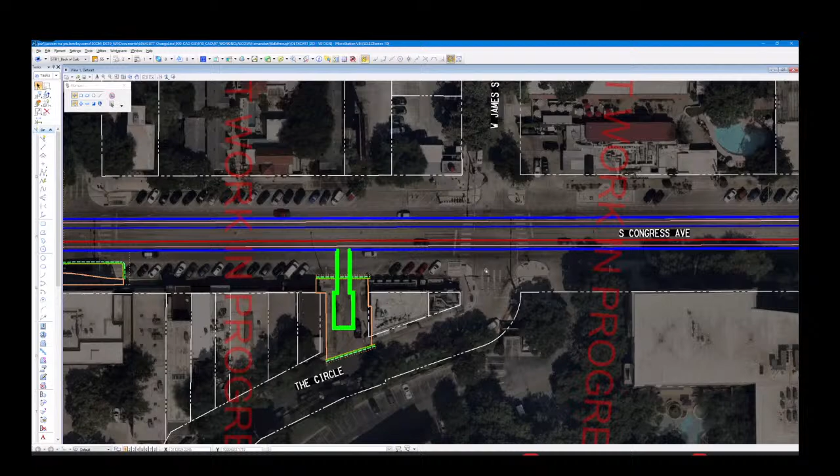I was thinking more of, why not have the exit in the middle of the tunnel, close between the two stations, if it's for safety? So you mean further north? Close. Yeah, this is really close to the other one. It seems like you were just off by a couple hundred feet or so. That's exactly right. Yeah, we are just off by a few hundred feet in this particular instance. There's not a ton of free real estate in this area. Not to say it couldn't go other locations, but based on the analysis, we did look at a few locations for this particular egress, and this was the most suitable location that we came up with.

So sounds like the question is also, why didn't we slide the station a little further north in this district? Is there a reason why this Academy Drive, James Circle area isn't where the station is, so as to avoid that emergency entrance? So yeah, if we were to slide the station further north, that would change the egress and exit points of the station box itself. We do feel that this corner here where there's some unbuilt real estate is a very suitable location for that primary entrance. So if you shift too far north, then you're losing that opportunity and potentially looking at other impacts for the station box.

So what I'm hearing you say is that station entrance takes up a lot of space, and if we shift the station north, we would wind up impacting a building with that station entrance. And this was an attempt to avoid building impacts where possible. That's exactly right, Lonnie. Yeah. Making sure. Engineering speak is different than public relations speak.

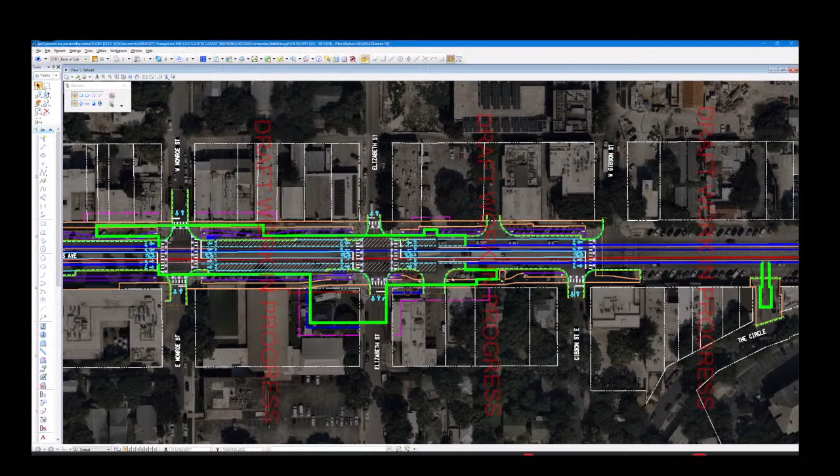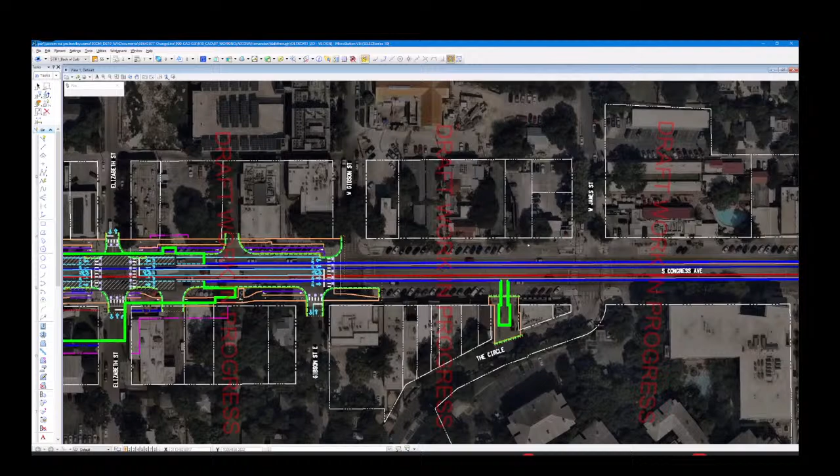Now let's slide north and head over to Academy. I think there were a bunch of questions that have been coming in about Academy. So let's keep sliding north. Yeah, I think what we're seeing in the chat is just a request to look at Academy once more on the screen. So if we can just zoom in a bit. There we go. There's Academy Drive and Nellie. So those white lines are those right-of-way lines. It doesn't look like there's any impact at Academy Drive or Nellie, right? It's just we're underground in a bored tunnel. Correct.

Meg, are there any specific questions that you've been hearing that you wanted to bring up at this point? No, but I see Bailey Harrington had his hand raised. Well, let's see. Bailey, there's multiple Bailey Harringtons. So would the real Bailey Harrington please stand up by raising your hand, and then we'd happily put you on screen. There we go. All right. So Bailey, if you unmute, you'll be able to be heard by everybody.

Thanks, appreciate it. I'm on the phone and the computer. So I know I saw somebody from the city responded to this, but maybe we can dive a little bit into it. There's a lot of boring, open cutting, probably retention requirements and tiebacks that have to happen with all this. And all the buildings in this section of South Congress are extremely old, you're talking late 1800s. How are we monitoring? I know they do this all the time in big cities, but what kind of process does AECOM expect from the contractor in terms of adding monitoring devices to buildings, to make sure that the structural integrity of these buildings is maintained throughout the life of construction?